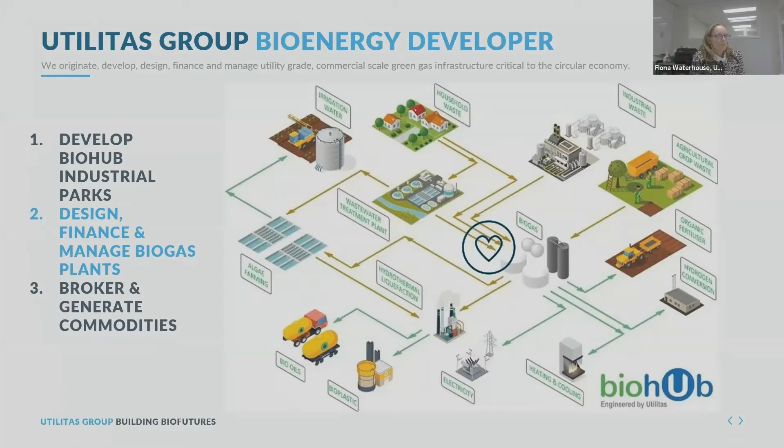So just by way of introduction for those of you who don't know, Utilitas is a bioenergy developer. We've been in the Australian market for... ooh, I've lost you there.

Yeah, that's great. Okay, so Utilitas is a bioenergy developer. We originate, design, finance and manage utility grade, commercial scale green gas infrastructure critical to the circular economy. Biogas from anaerobic digestion is at the core of our projects, and we look to build out an industrial park around a biogas plant, basically to optimize the synergies of upstream and downstream processing. So we design, finance and manage biogas plants, and we've also become a broker - we broker energy, and as our portfolio of projects rolls out, we will also be brokering everything related to a biohub in time.

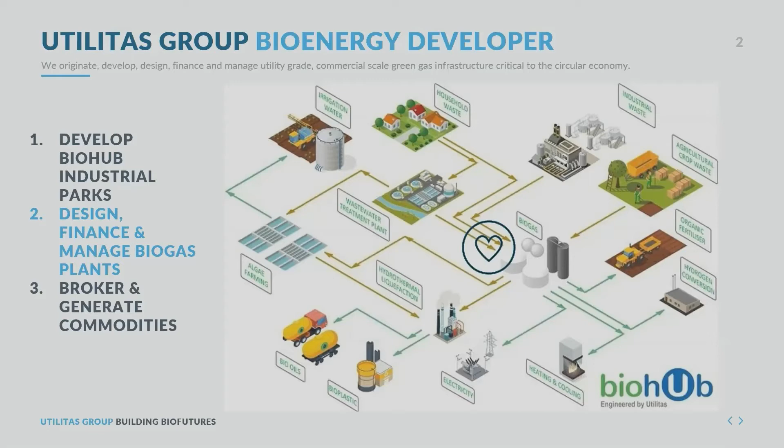So I'll give a specific update on our Bundaberg biohub, but I thought I'd also provide a little bit of context to draw together some of the discussions from the first part of this session.

There are three major challenges in the Australian market to commercialising utility grade biogas projects. The first is customer expectations. From the 350 site assessments we've done, mostly with industrial food processors and some municipal wastewater treatment plants, customers expect a biogas developer and operator to deliver sustainable waste and wastewater disposal with no capex to them and parity or better OPEX.

At the same time, they need carbon neutral energy - electricity, gas, and in future transport fuel - again with no capex and parity or better OPEX. We also need to contemporaneously report on progress towards net zero emissions from production, but increasingly big food and beverage clients are under pressure to demonstrate net zero logistics too, which is potentially an even bigger challenge. These are very high customer expectations, and it's hard to get commitments unless you can deliver on all three, which has been one of the challenges in scaling a portfolio of projects in this space.

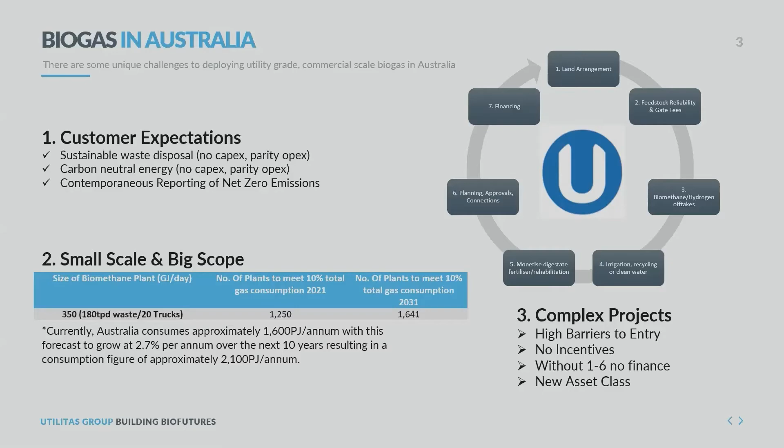So actually Jarrod asked me if I could present, and this is the first time we've ever presented this from our data—the levelized cost of energy in terms of biomethane. I've constrained this to just being the actual gas upgrading unit, and you'll see there that I'm assuming the biogas supply to the upgrader is at $8.50 a gigajoule, and that the parasitic demand for that upgrader only is able to be acquired at $80 a megawatt hour.

The land lease for the upgrader only is $100,000 a year, and the CTS, the custody transfer station, actually belongs to the network owner. We've allowed for a 25-year life, a 6% discount factor, and we've assumed no feed-in tariff in either direction, no incentives and subsidies.

One of the critical things about the Australian market is there's no feed-in tariff for feeding gas into the grid like there is in the UK, where basically for the first 140,000 gigajoules, I think it is, you receive about $22 a gigajoule as a feed-in tariff from the network.

None of those things exist here, but the other side of that problem is there also aren't tariff rules around what you can be charged by the network owner for the custody arrangements for putting the biogas into the gas grid. Some of the discussions we've had with network owners have suggested that a custody transfer fee could be anything up to $3 just for the supervision of the gas into the network. So those things need to be defined, and they haven't yet been defined.

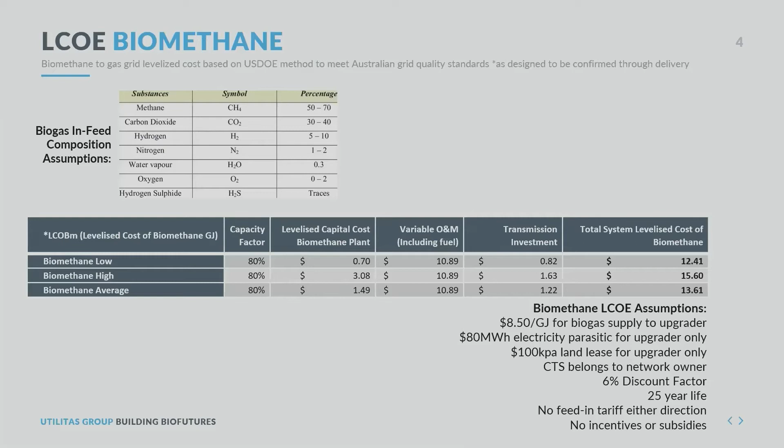So just to give you an update on it, Utilitas has long stated, since our launch at International Energy Week in Melbourne in 2010, that we had the vision to unleash up to 100 biogas plants across Australia in 100 regional communities. That still remains our vision, and we're working towards that every single minute of every single day.

Biohub 1 is Bundaberg Biohub, where we acquired the retired Bundaberg East wastewater treatment plant on 9.5 acres off the Bundaberg Regional Council. It took a number of years to go through a few tender processes, but the council were fantastic, and we basically just held hands until we delivered it. It was an amazing outcome.

That site is master planned, and we have a number of tenancies on that site. The Bundaberg Regional Council and Utilitas both rent laboratory space that's existing on the site. The Bundaberg Council water services laboratory is located there, and so is Utilitas's biorefining laboratory and pilot scale biorefining technology.

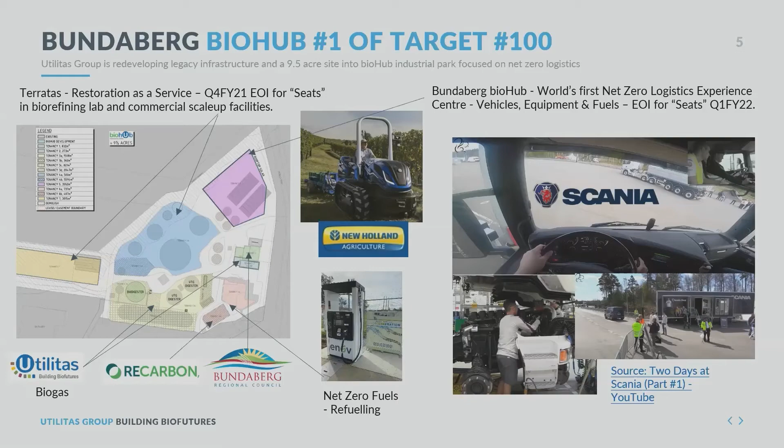Yeah, wow, that's it. So that's our beautiful site - the local custodians, the Bailai, the Gurang, and the Taribelang Bunda people. We have an active process to start showcasing some of the things the Indigenous community have been doing for millennia in the bioeconomy.

We always say that we're in bioeconomy 3.0 in Bundaberg. Bioeconomy 1.0 was the Indigenous bioeconomy, bioeconomy 2.0 was the agrarian food processing bioeconomy, and bioeconomy 3.0 in Bundaberg is net zero production and logistics.

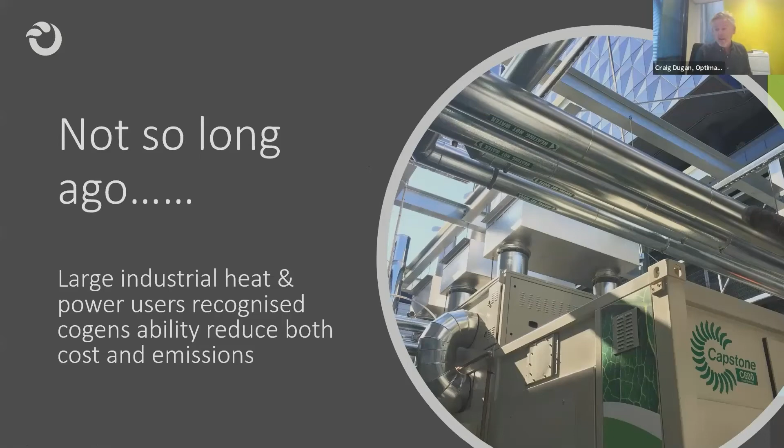Cogen behind the meter, or trigen as they are, look fantastic. That's still the greenest complex in Melbourne, probably in Australia.

But it's fallen out of favour because of natural gas. Not so long ago, gas was seen as clean, cheap and abundant, and electric cars were still over the horizon. Obviously that has changed. We've reached a tipping point, and one thing we're certainly seeing in the last 6 months is that the market is changing faster than we could have anticipated. I'm seeing customers today who are desperate for what we can do, whereas 12 months ago they weren't interested, because the environmental issues weren't important to them then. They paid lip service, but now it's a problem.

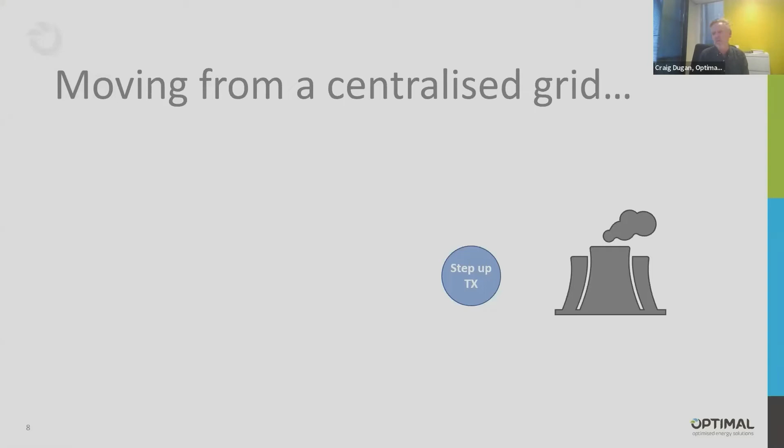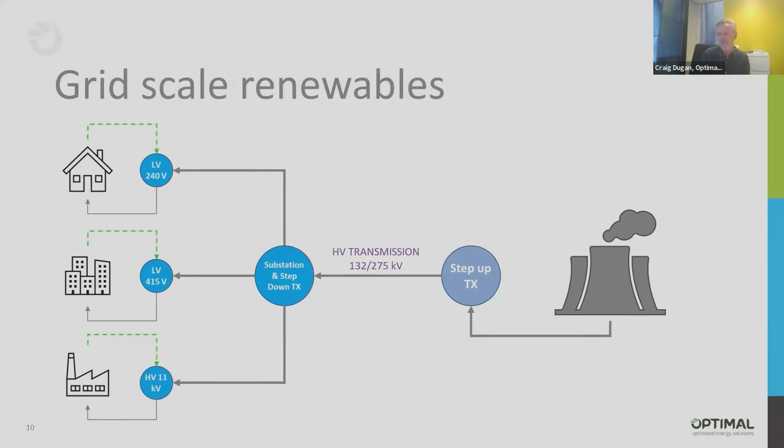We've all seen what's happened to the electricity grids. If I move these animations forward, everyone's put rooftop solar in. We're now seeing grid scale solar, grid scale wind, grid scale batteries. All of that is old news and part of the modern electricity network.

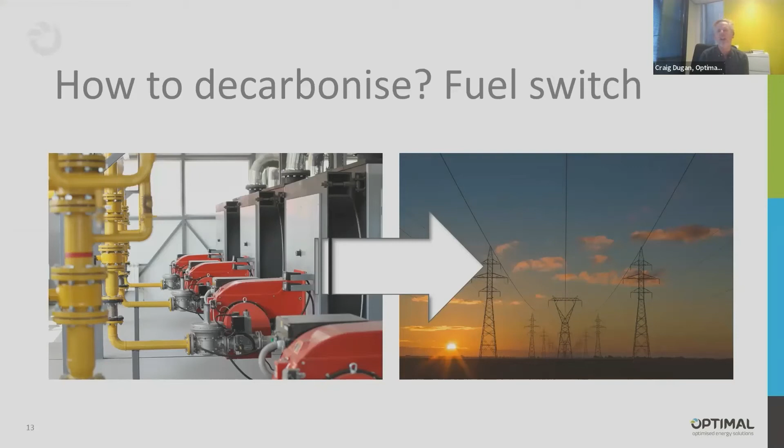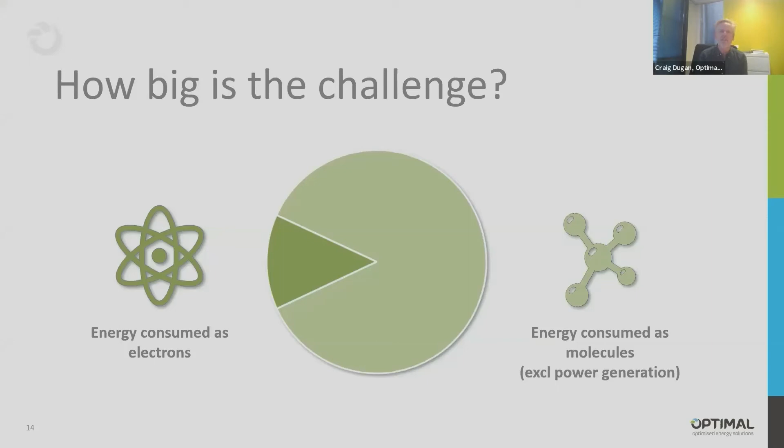If we think about thermal, that's where it really gets interesting for a lot of our customers. If I use McCain's as an example, Powercor said to McCain's, you cannot power your boiler from electricity. They've got 8 megawatt electrical, 25 megawatt thermal, and the grid just does not have the capacity, even if McCain's wanted to change that gas boiler out to electric. So here's the problem: in general terms, these big industrials, particularly in food manufacturing, more than 50% of their energy is thermal, and if it's steam, it's not going to come from heat pumps.

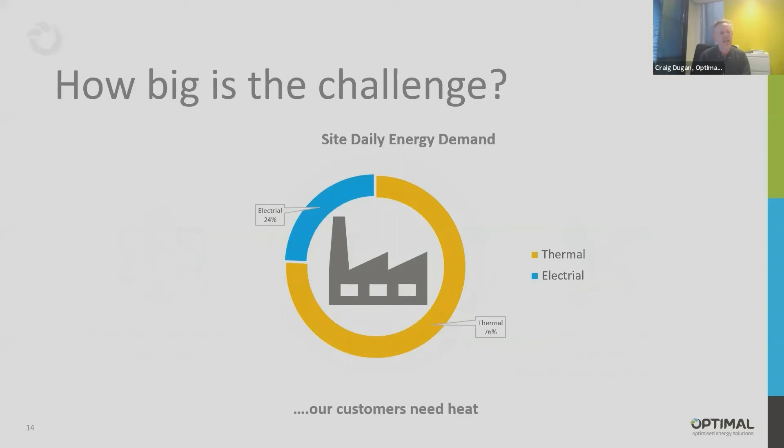This is the McCain's example in particular. So how does McCain's go to net zero? It's a family-owned company, which they want to do.

Back in the built environment, at Collins Square we power the whole of Collins Square. They wanted to put some solar power in there, so they did, but the total available roof space was only 100 kilowatts of solar. That's a fraction of the building demand. So if you want a building that's net zero, just simply putting a bit of solar on the roof obviously doesn't do the job.

The other interesting part about this is Victoria's electricity grid. What happens when you push the animation button is the red moves from the west right across to the east. In other words, by 2025, Victoria's or Melbourne's grid capacity is going to be severely constrained, and this slide was actually produced before electric cars were really coming to the fore. So our existing electricity networks are already constrained.

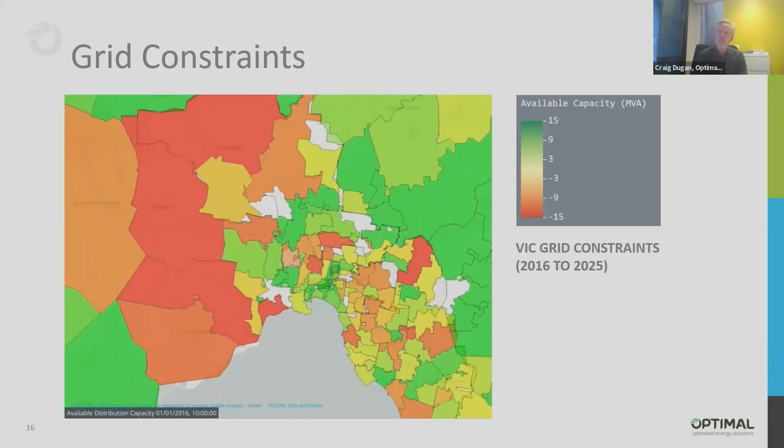We have multiple large customers, both in CBD customers, City of Sydney, some buildings in Melbourne, where one of the drivers for putting our systems in was simply because there wasn't enough power available from the grid. We need more than cables, and simply building more cables is just going to add more to our electricity cost. Interestingly, though, there's the same map of Melbourne, and that's Melbourne's gas grid. The gas grid goes where the electricity grid goes. So if you can have green molecules in that gas grid, you can get green electricity to those customers through the gas grid.

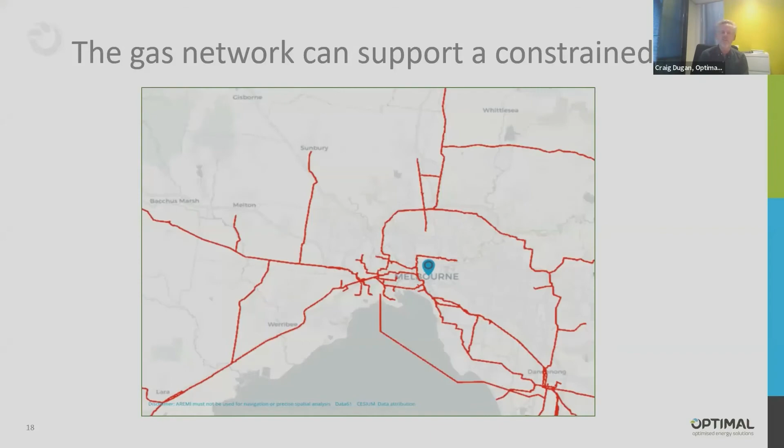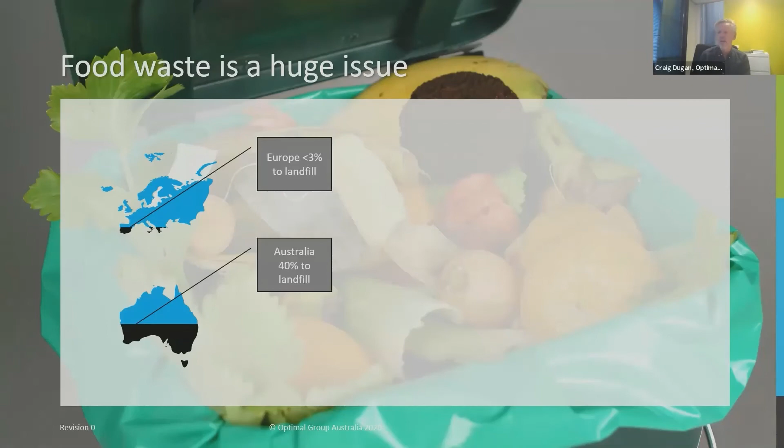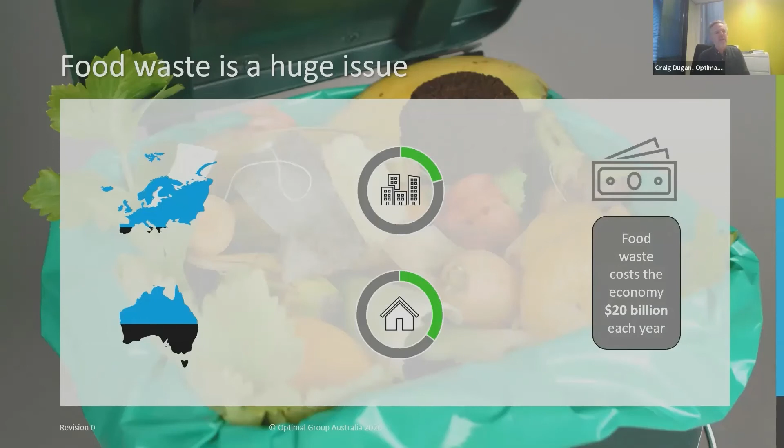Food waste, as we all know, is a big problem. The numbers here in Australia compared to Europe are frightening - 3% of Europe's waste goes to landfill, here it's still over 40%, and that's a massive source of greenhouse gases. That's spread evenly between commercial organics and residential organics. So it's a big figure in terms of environmental footprint, but it's also a big figure in terms of opportunity.

The answer is in our bins, I guess, is an opportunity, but it's also in harvesting green electrons. When you're talking about renewable gas, we really don't care, and our customers don't care, if it's hydrogen or methane. In fact, most of them don't even understand if it's hydrogen or methane. They just want green gas.

This is our traditional natural gas model, and unfortunately, Australia - that gas that comes from the wellhead - we're the largest exporter of natural gas in the world, 77 million tonnes per annum, but we also have the most expensive domestic gas in the OECD. Andrew Liveris told us on Four Corners last week that all of Australia's cheap gas is gone. I would love to ask him, if all our cheap gas is gone, how come we're still the world's largest exporter of natural gas? That doesn't make a lot of sense to me.

So our gas transmission network is obviously an ideal network to transmit green molecules in terms of biomethane. Ditto for hydrogen. We saw yesterday AGIG announced the first gas from their project going in. So this is now starting to happen.

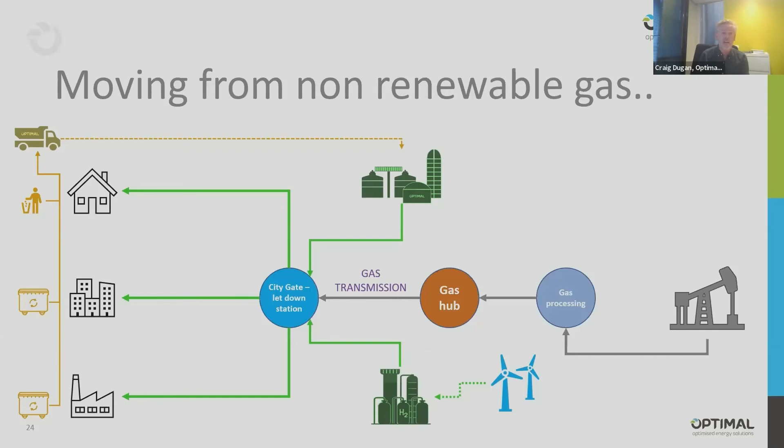The economics of it, I think, are going to be the interesting thing, because even if we get to Mr. Taylor's $2 a kilogram for hydrogen, that's still $20 a gigajoule compared to current natural gas prices of $10 to $14 a gigajoule. So hydrogen is going to be expensive, and I think this is where biomethane looks really good, both into pipelines, but there's no reason why that can't go into LNG or CNG, as has been done in Europe and in North America.

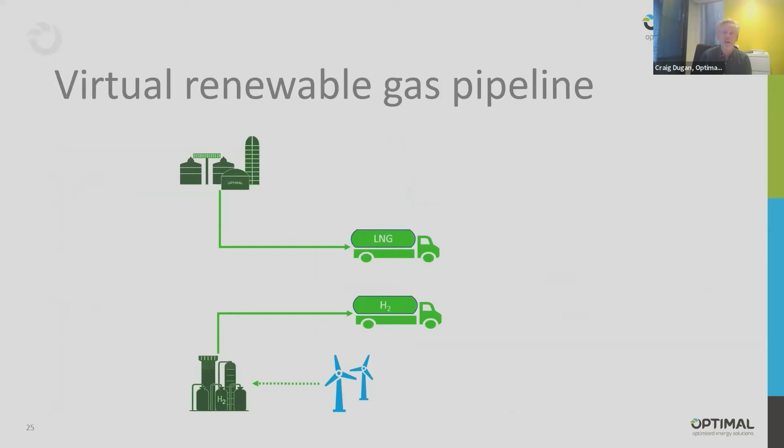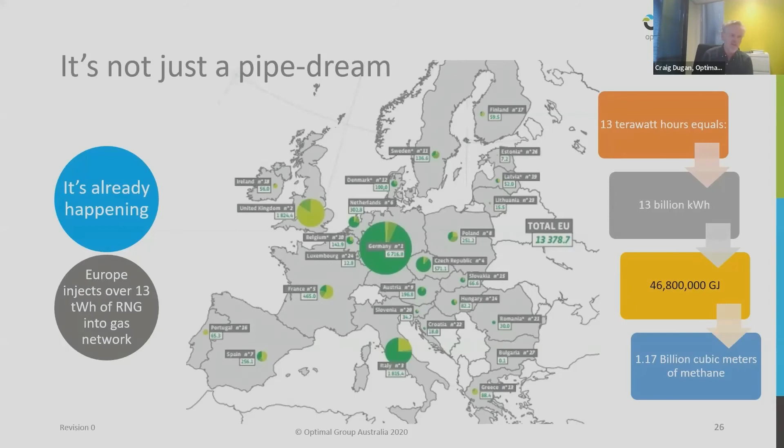And in fact, this slide here shows this is already happening in Europe. There's large volumes of renewable gas going into the networks in Europe, and that's driven by large volumes of waste being diverted from landfill into anaerobic digesters.

So if we start to see what this is starting to look like in Australia, as I said before, we've got very high domestic gas prices, and if governments think that we're going to be able to pay for LNG import terminals - if you go through the fine print, the people developing those LNG import terminals say that the gas price point they need is $12 a gigajoule. Well, if we've got $12 a gigajoule gas coming into our networks as a wholesale price, then get ready for gas prices to go up even higher than they currently are.

So great opportunity for biomethane. I think, to Fiona's point, yes these projects are economically tough, but one of the unique things about Australia is that we have a domestic gas price that is ridiculously high, and I think our current governments will make sure it stays that way.

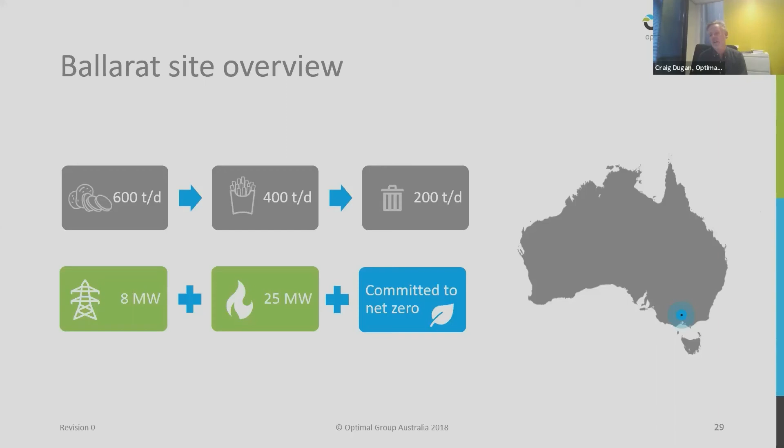So let's have a look at McCain's. At McCain's at Ballarat, they process 600 tonnes a day of potatoes to make 400 tonnes a day of French fries, 200 tonnes a day of waste - that's the peel, and because potatoes aren't square, it's all the round bits that don't go into making square French fries. As I said, they've got an 8 megawatt electrical load, 25 megawatt thermal, and they're committed to net zero.

So what drove this project? They were already producing biomethane from their covered anaerobic lagoon, but they wanted to improve the quality of that, the deliverability of it, and the certainty around that. So they felt that the best way to de-risk that was with an on-site anaerobic digester.

They're very keen, obviously, to minimise their CO2 emissions. They want to make sure they maximise the productivity of biomethane and the availability of the gas plant. And they also want to make sure they could integrate with their behind-the-meter 2.5 megawatt solar array.

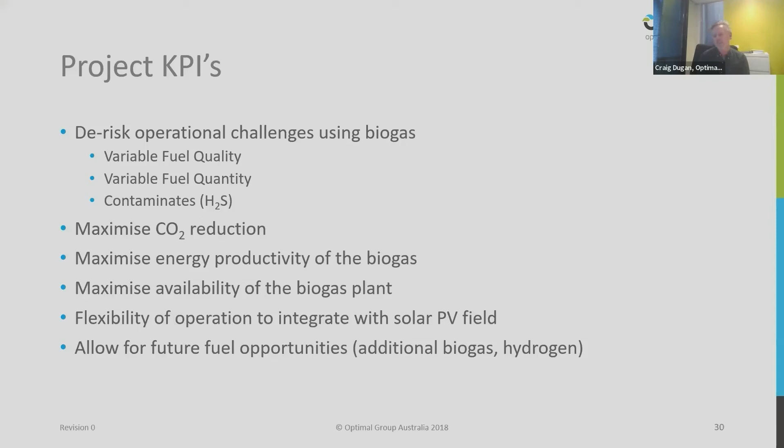So what does it look like? The anaerobic digester, the AD side of it, was designed by Wood out of Ontario, Canada, but Wood are McCain's global engineers.

So our 2 times 600 kilowatt micro turbine packages - our turbine, our largest engine size is 200 kilowatts, so we've got 6 engines there, and we're producing 1200 kilowatts of electrical load. We've put space in to put another 600 kilowatts in if the biogas production rates exceed the expected numbers.

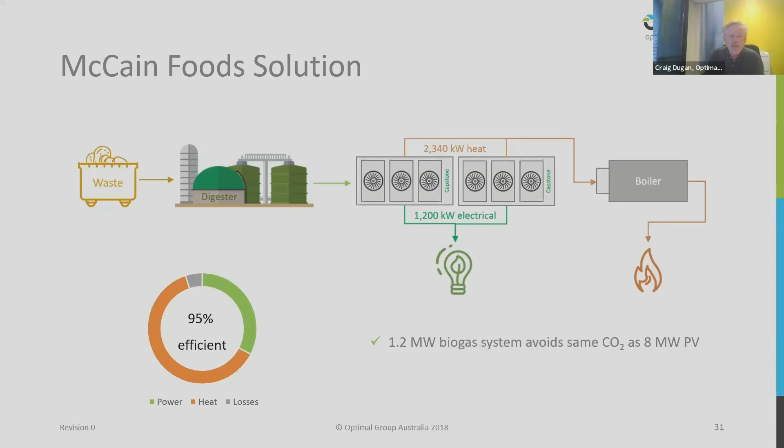The exhaust, because the exhaust from a gas turbine is basically hot air - 19% oxygen, 2% CO2 - it's perfect combustion air for a boiler. So their 25-year-old, 25 megawatt steam boiler is having a new burner fitted to it, which we're doing. And that burner, instead of burning cold combustion air - and Ballarat in the middle of winter is really cold - instead of burning cold combustion air at 10 degrees Celsius, it's burning hot combustion air at 280 degrees Celsius.

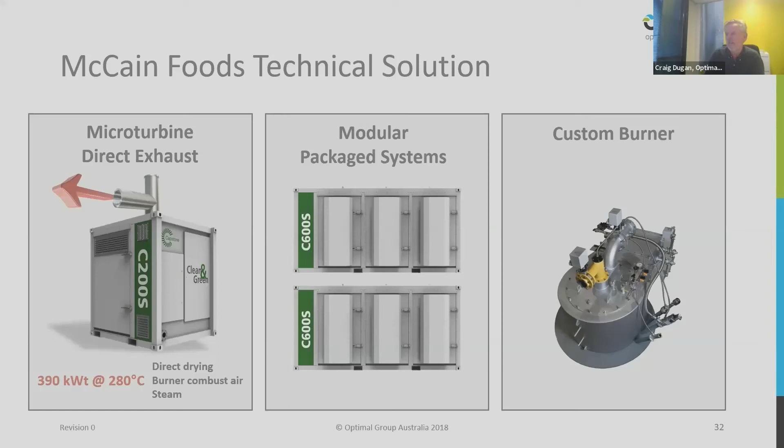We've used a burner from SAACKE out of Germany. The reason we've used that is because they have extremely good technology on minimising NOx levels. One of the potential problems you have when you're using hot combustion air that's already got a bit of NOx in it, you need to make sure that you don't create a NOx emission problem.

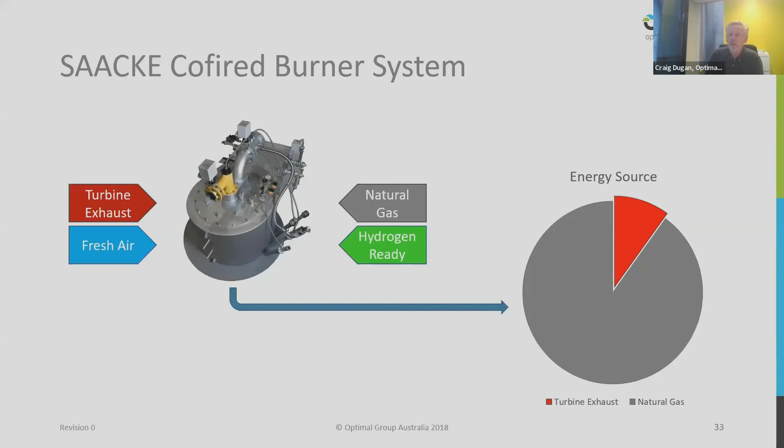The SAACKE low NOx burners are really, really good. We're still looking at potentially developing a hydrogen project at McCain behind the meter, so we wanted this burner to be hydrogen ready. By putting that exhaust into the turbine, into the boiler, we get basically full recovery of all the heat that's in the turbine exhaust.

And that takes about 15% load, natural gas load, off the McCain boiler. So you can see in this waterfall chart the emission reduction steps McCain have gone through. The solar array is the block in yellow, and that's now been done. The biodigester and cogen system in green are the reductions that will come from that. They've secured the rest of their electricity from an off-site PPA, that's the blue. So that leaves, how do they get to zero?

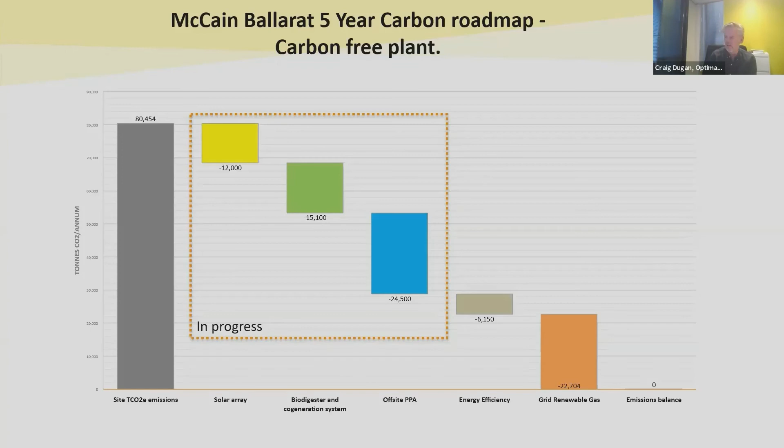There's some additional energy efficiency steps they can do. They've got huge refrigeration plants, so there's an opportunity to do some smart re-engineering of their refrigeration systems to reduce that load. But the rest of it, we believe, will come from grid biomethane - grid scale biomethane plants putting green gas into the network. Customers like McCain and other big international companies with mandated emissions targets - the only way they'll get there with the current constraints of the electricity grid is green gas in the grid. So that's how McCain will get there.

Now, what's interesting about the McCain facility is that directly across the road, at the Ballarat Freeway, on the other side is Central Highlands Water. That's currently an aerobic sewage treatment plant - there's no anaerobic digestion going on there. But you look at that and think, well, if you took the biosolids from that sewage treatment plant, and either built another anaerobic digester on site at McCain or built one at Central Highlands Water, all of a sudden that orange square here might in fact be able to be produced effectively behind the meter using these biosolids.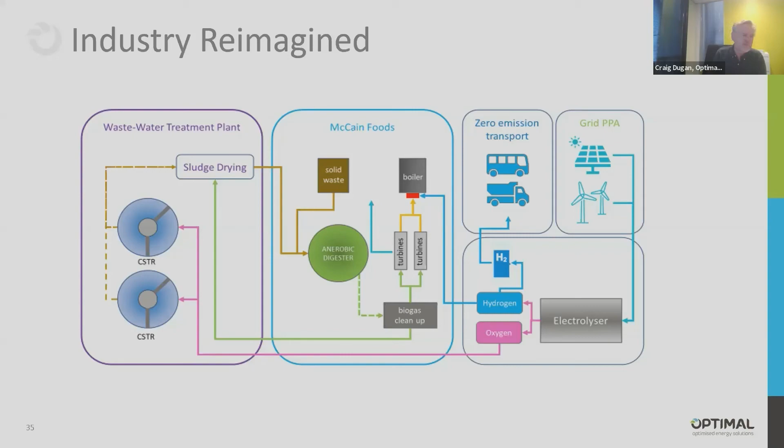If you were to do that, and had some surplus green electricity from solar - because sewage treatment plants generally have a lot of land around them - maybe you'd put in a hydrogen electrolyser, then take the oxygen from that electrolyser and turn off the existing aerators. At Central Highlands Water it's about 2 megs of electrical load, and if you replaced all that with the same amount of biological oxygen needed directly from an electrolyser, you save that load for those aerators, and then you look to create value for the hydrogen through mobility markets. So that's - I've gone through that relatively quickly.

Less time for questions, but that's sort of what we're doing. So just in terms of where we're up to, the turbines are on the ground and currently being moved onto their concrete plinths. The biogas compressors are on the ground, and the pipelines between the digester and our plant are currently being planned. McCain have just recently let the order for the anaerobic digester. So we'd hope by first quarter next year that we'd be up and running.